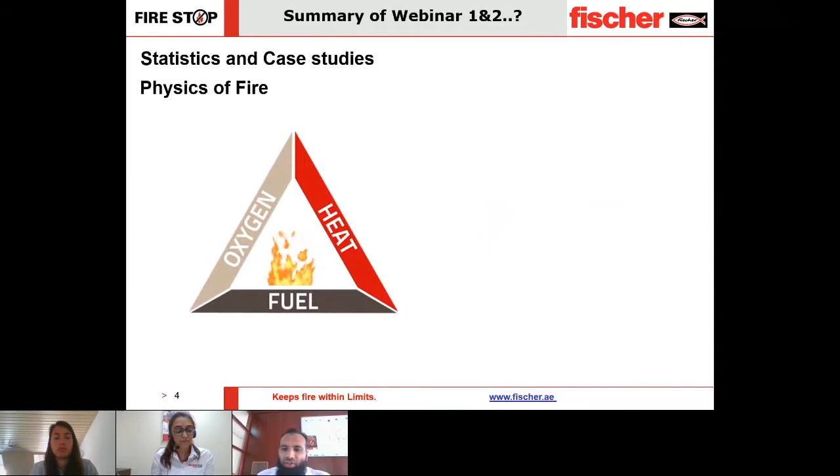Just to recap, in the first installment of this Firestop series, we had discussed some case studies concluding the importance of taking a balanced approach to fire protection, which should include the active as well as passive fire systems. We saw how fire behaves and understood the different stages of fire progression. Then we saw Firestop as part of the requirement within passive fire protection systems and the code requirements of the same.

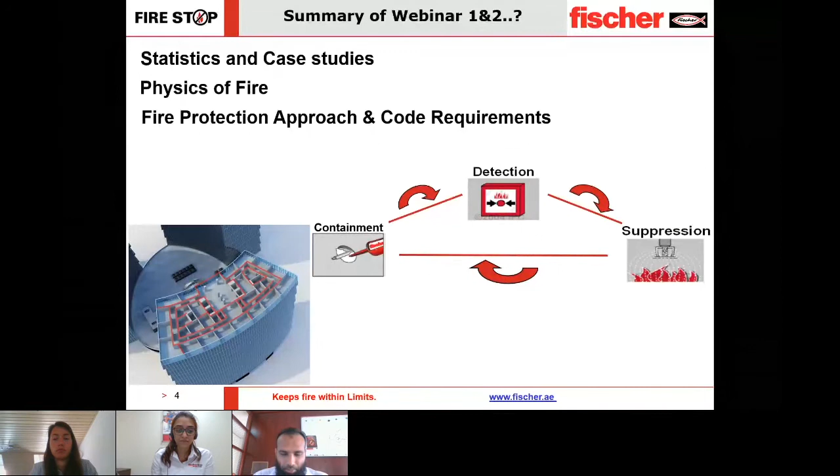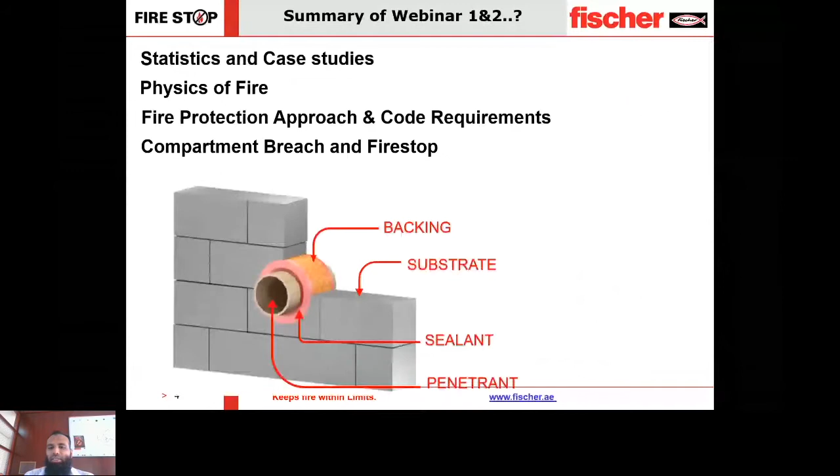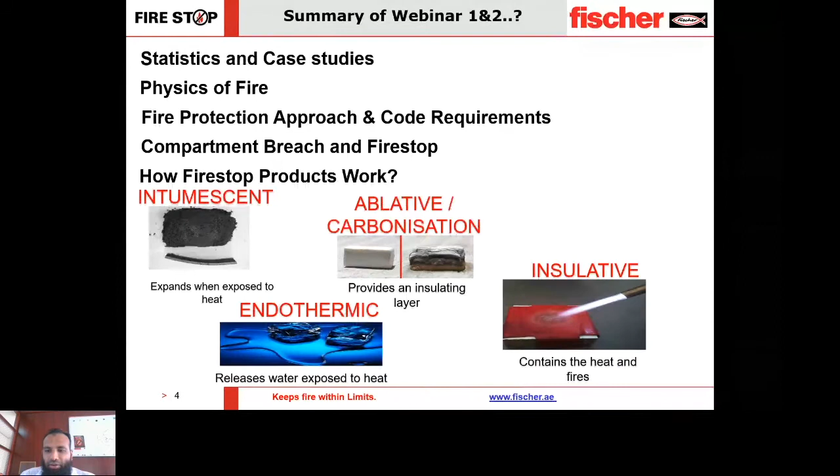In the second episode, we talked about the system approach for fire stopping, where all the elements of the system are to be considered while looking for a proper solution. We also discussed the different technologies behind the Firestop products, and finally the standards for testing and certification was discussed in detail, including the EJ or engineering judgment discussions that we had.

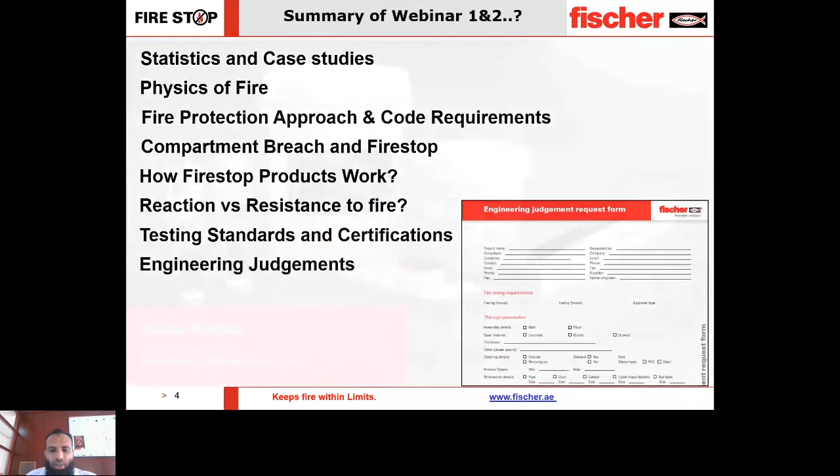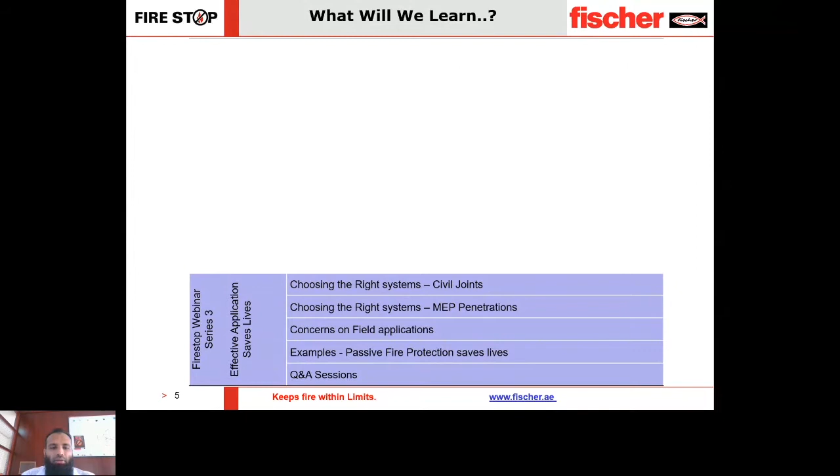Let us continue with this presentation today, which is the final in our series, and we will be looking into the right systems or solutions that we as Fischer would offer in the civil joints as well as MEP penetrations. Then we would discuss some concerns regarding applications, and finally we would wrap up the session by showing some examples of how passive fire protection worked, and a question and answer session will be at the end.

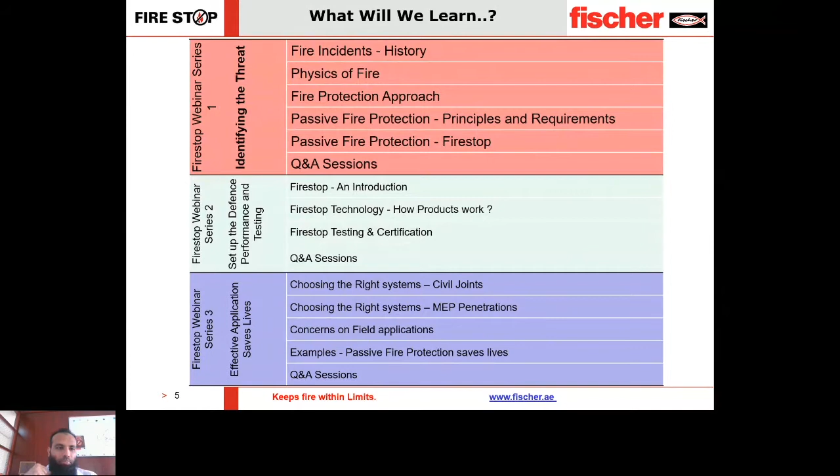So that we had covered the entire range and tried to do justice by giving as much information as possible for Firestop. In the last episode, we had shown that we have a range of products which are divided into 4 main categories: the sealants, sprays and coatings, wraps and collars, and some special products.

Now, many times people would have this question: why are there so many different products, and why can't there be one product as a solution for entire fire stopping in a project? We have seen that there are several types of breaches that are caused in a fire rated barrier. Each of these breaches has its own different set of parameters. You have different types of penetrants that are going through, and hence to address all of these solutions, all of these fire stopping requirements, we would need a range of solutions which would be addressing individual applications.

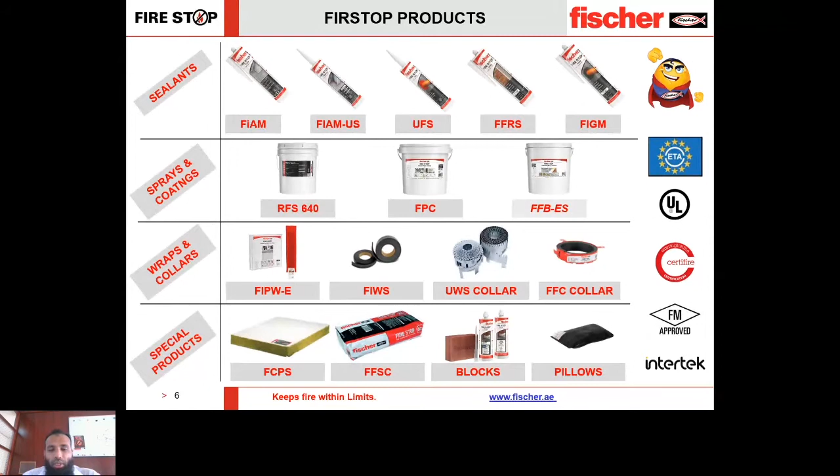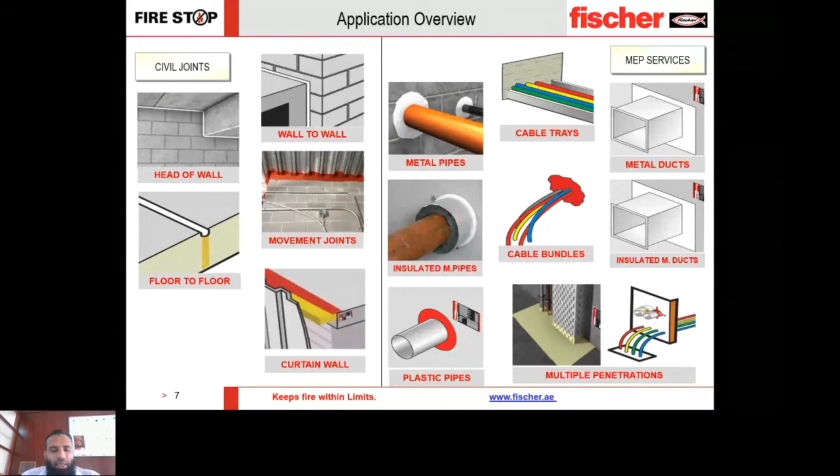We would look at the applications that we face in day-to-day fire stopping, and we have divided that for simple understanding into civil joints as well as MEP services. When we talk about civil joints, we are talking about the joints between fire-rated members, fire-rated barriers, or sometimes, as in the case of a curtain wall, a fire-rated barrier and a non-fire-rated facade system. And when we talk about MEP services, we are talking about all the different types of penetrations that would be going through.

And to discuss about the civil joints, I would like to invite Ansel. Ansel, can you take us forward in our quest for finding the right solutions for fire stopping in civil applications? Sure, thank you Muzaffar. So coming to the first application that we generally come across in the field would be the head of wall joint.

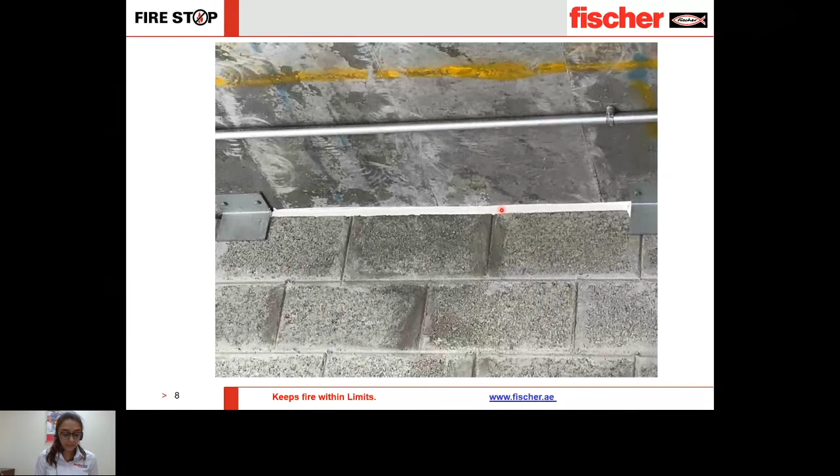This is a joint between a fire-rated wall as well as a fire-rated floor. Now we need to consider a few parameters while choosing the right system for it. The conditions would be the aesthetics, like is your joint exposed? So you will need a material that would be compliant with the painting requirements as well, and also meeting with the color requirements as per the architectural plan. Similarly, you would also need to take care that there will be some structural movement within this joint system, so the material needs to be capable to withstand the movement, and mostly you need to take care of the aesthetics or the acoustics of the joint.

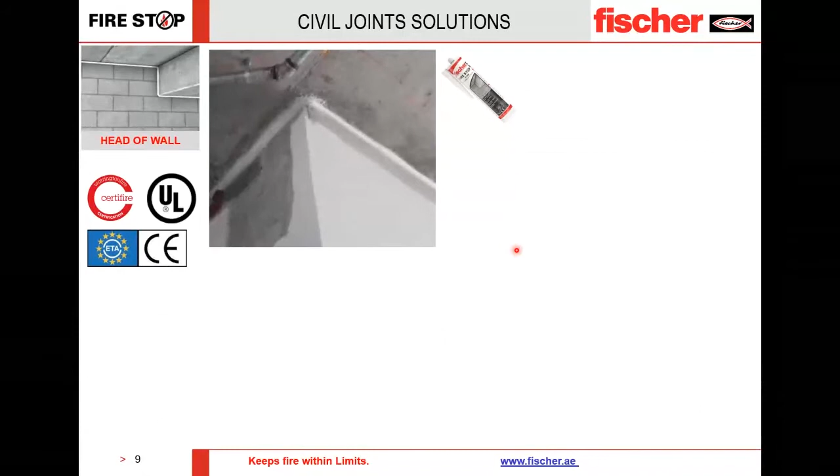So the most common solution we would propose would be our acrylic-based sealant called FIAM, Fischer Intumescent Acoustic Mastic. The name itself says that it takes care of the acoustics and it's an intumescent material. As it is an acrylic-based material, you can paint over it, and it is available in white.

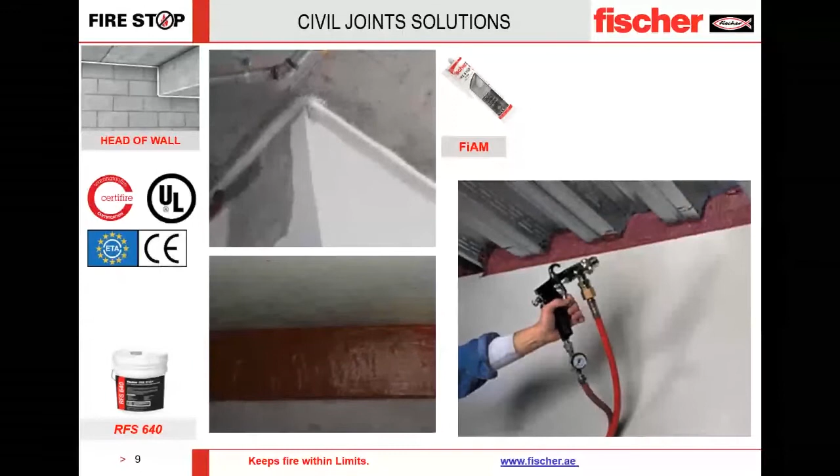You can apply the sealant with a thickness of 10 mm over a PE backing rod, or 5 mm over a stone wool backing. The movement capability is tested for up to 25%, which is enough for a normal head of wall joint. We also have another solution called the Rapid Fire Seal, or RFS 640, which is red in color, suitable for areas with a false ceiling. It has a movement capability of up to 50%, and is applied like a spray.

Moving to the next slide, the other civil joints to consider are wall-to-wall and floor-to-floor joints. The products proposed are similar to the previous application. In addition, we propose the fire-rated silicone, or FFRS, which is used for externally exposed fire barriers.

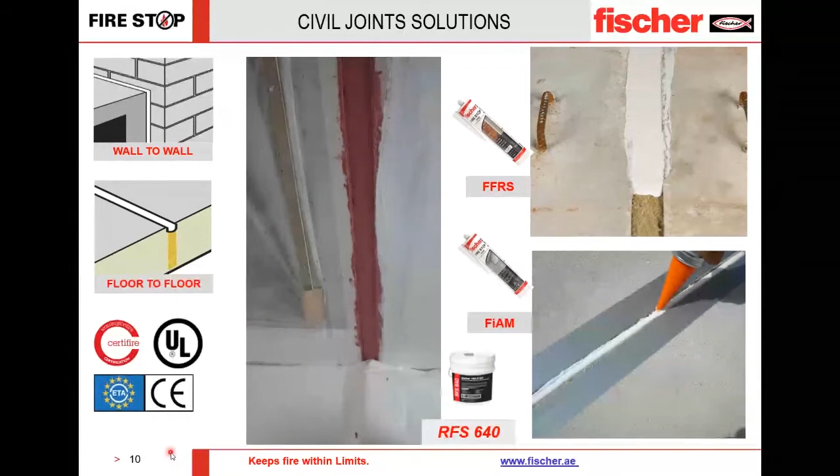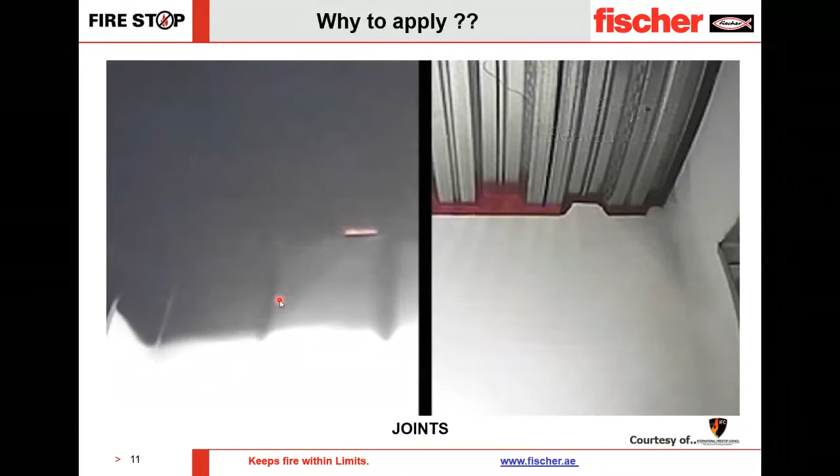Moving to the next slide, it is very important to have a properly sealed room for civil joints. In this video, you can see that an improperly sealed room fills up with a massive amount of smoke very rapidly from the joint gaps. When smoke is present, visibility is reduced, and when visibility is reduced, panic sets in, and building occupants will not be able to escape easily. It is also known that apart from flames, smoke and toxic gases are the most hazardous. So the joint must be properly sealed.

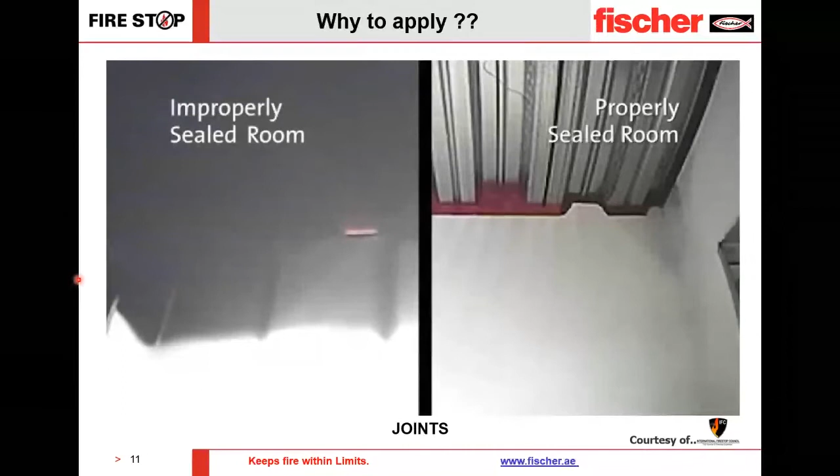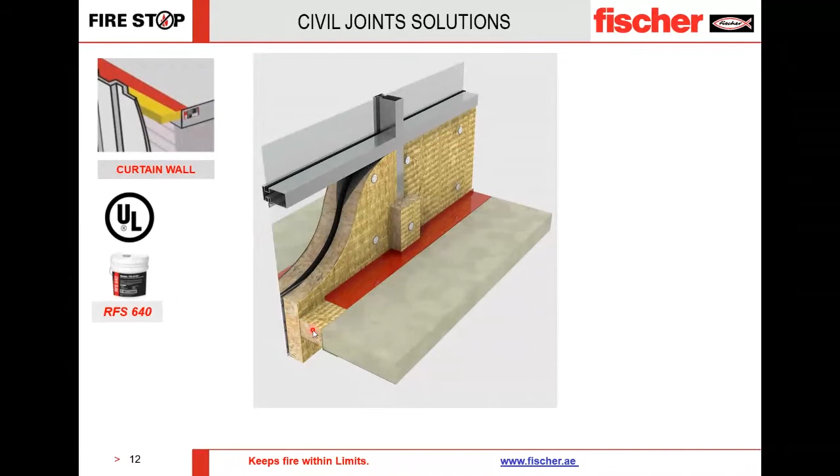Coming to curtain wall application, the main criteria here is the joint formed between a fire-rated and a non-fire-rated facade system, which would be approximately up to 200 mm. The solution for this gap should have sufficient insulation so the glass does not break in a fire incident, and then close the gap in the event of flame. The proposed product would be the RFS 640, with a mineral wool backing and a spray sealant over it.

The thickness of sealing required to reach a fire rating of 2 hours is 1.6 mm thick. When it dries, it reduces to 0.6 mm thickness, and this is capable of taking a movement of 5%.

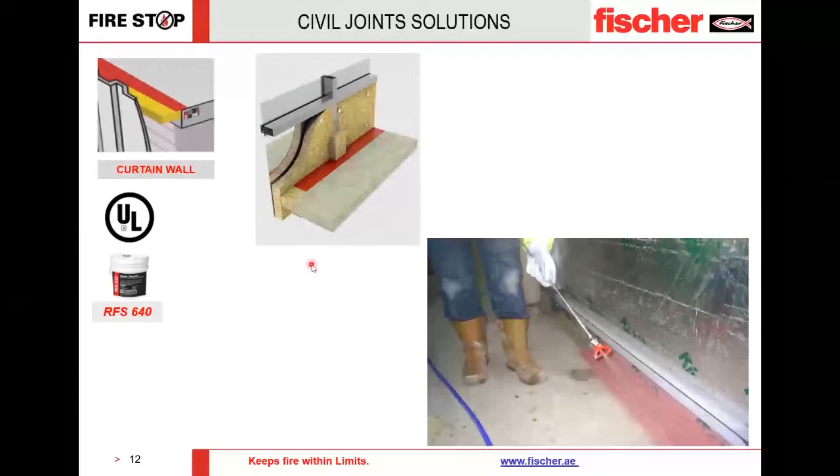You can also use another product, the FFB-ES, but the thickness is slightly more, over 2 mm. We also have a dry type of system where you compress the material and fix it using brackets, that's all. This material would be predominantly used even for glass facades as well as ventilated facades.

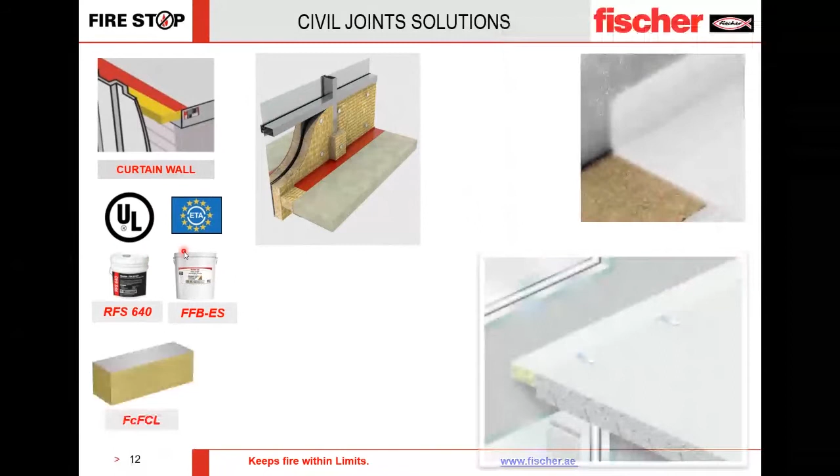This brings us to our second category, the rain screen facades, or cavity/ventilated facades. Rain screen systems are constructed with either stone material or an aluminium composite panel sheet. Quite often we see ACP sheets used, and these sheets provide an easy path for flames to pass and spread across the external facade.

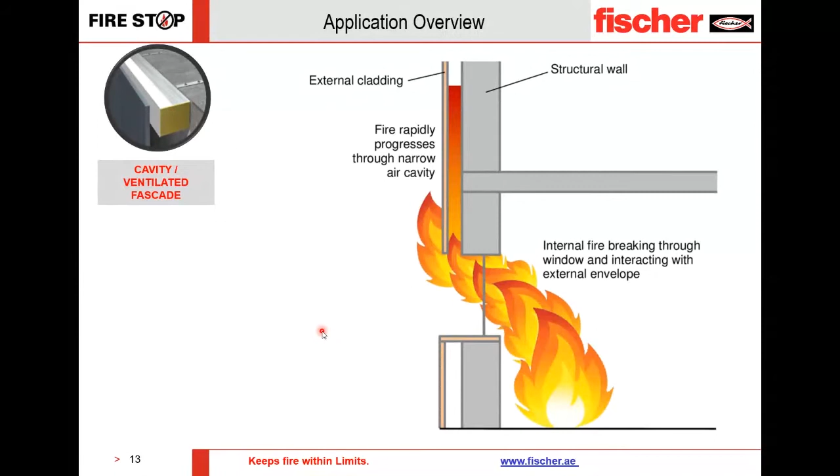Now, these ventilated gaps are a requirement for functional purposes. However, during a fire, this does not behave in a positive manner. So we need a product that provides ventilation during the lifespan of the building, but when exposed to fire, closes the gap. We have a product called the Ventistop, which has an intumescent strip that allows a ventilated gap of 25 mm, and when exposed to fire, it expands and closes the gap behind the facade itself.

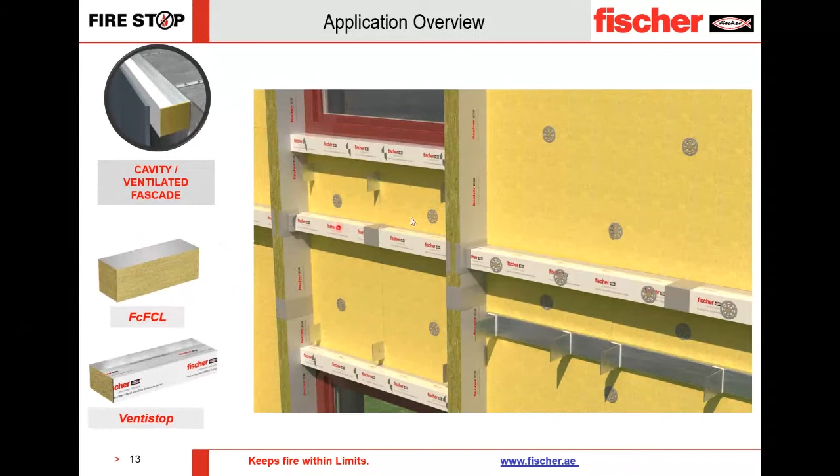We have an additional product, the FCFCL, which is placed vertically. In the next slide, we see an example of a facade fire, which is very common these days. The recent one being the Abbco Tower in Sharjah, UAE, where the facade played an important role in the spread of fire. So providing a proper solution is paramount to ensuring the safety of occupants.

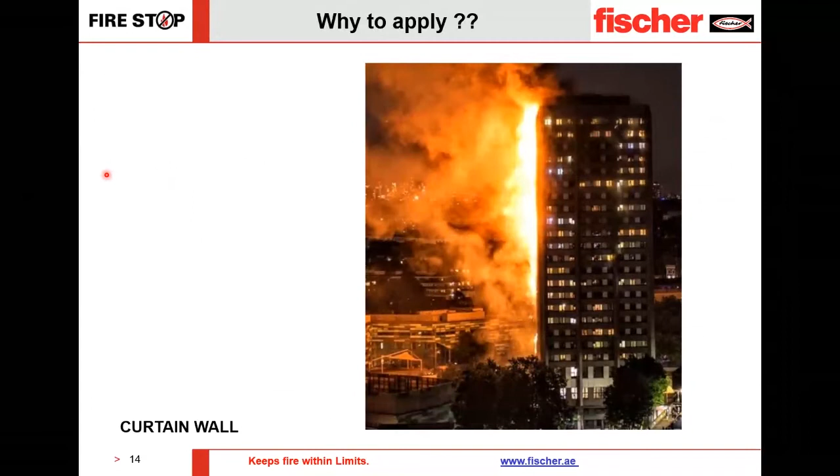Thank you, Ansel. Thank you very much for giving us a brief, Zafar, on the civil joints. Civil joints applications are really, really important. It is very important to note that civil joints are continuous joints, and a proper solution there would ensure safety of the building occupants. Now, moving on from civil joints, we come to MEP services.

In MEP services, we have several penetrations, and the first common penetration we look at are the pipes. Within the pipes class, we have the metallic pipes. So, Marion, can you take us forward in the metallic pipe solutions? What kind of metal pipes do we see on usual projects? Sure, Mustafa. Thank you very much for the introduction.

So first of all, for fire stopping MEP services, we always need to take a close look at what exact type of penetrations are going through an opening in a floor or wall. For metallic pipes on the construction site, you will find a huge variety, but metallic pipes are mainly made out of steel or copper.

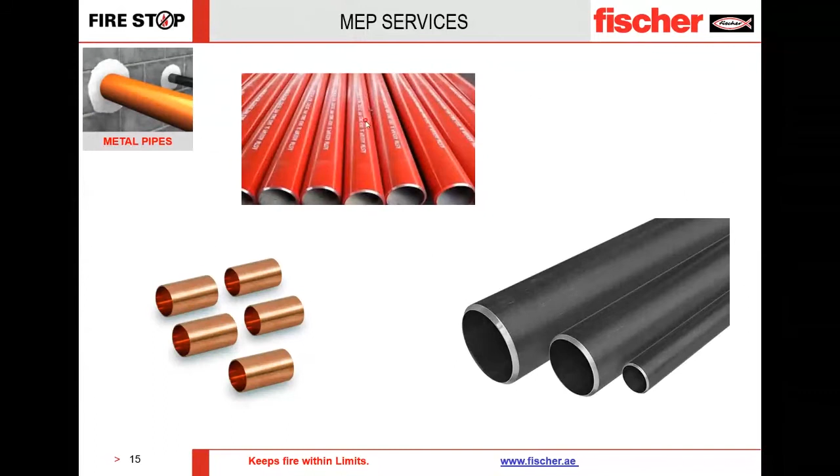For metallic pipes, Fischer can offer a variety of sealants with different approvals. The two most popular ones we offer are the Fischer EMUS and the Fischer RFS Rapid Fire Seal. Both are tested to the UL testing standards and have multiple UL listed systems.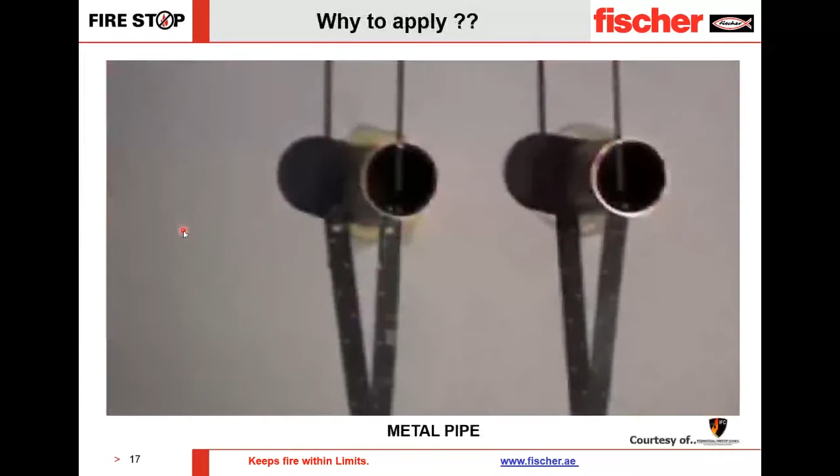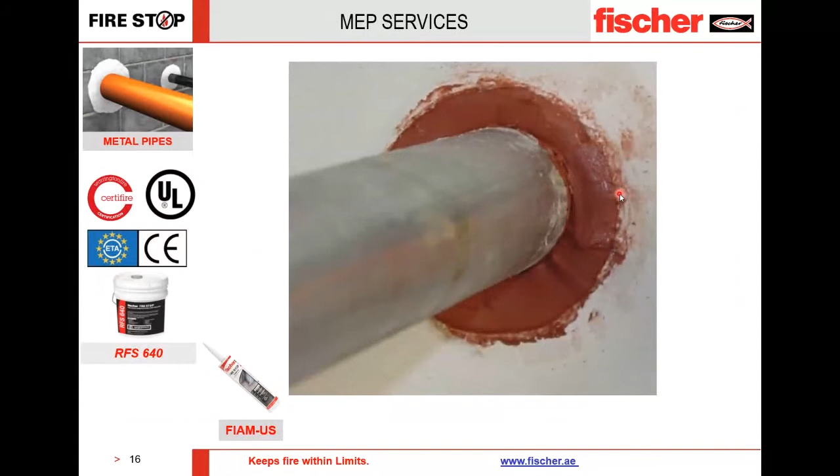The application for metallic pipes is usually very simple, as the advantage of a metallic pipe is that in a fire it stays integral and will not decompose. Because of that, we only need to close down the gap between the pipe and the opening, and the application is finished. We prepared also a short video which shows the impact a proper Firestop sealant has around a metallic pipe, compared to just using the standard foam which you often find on construction sites.

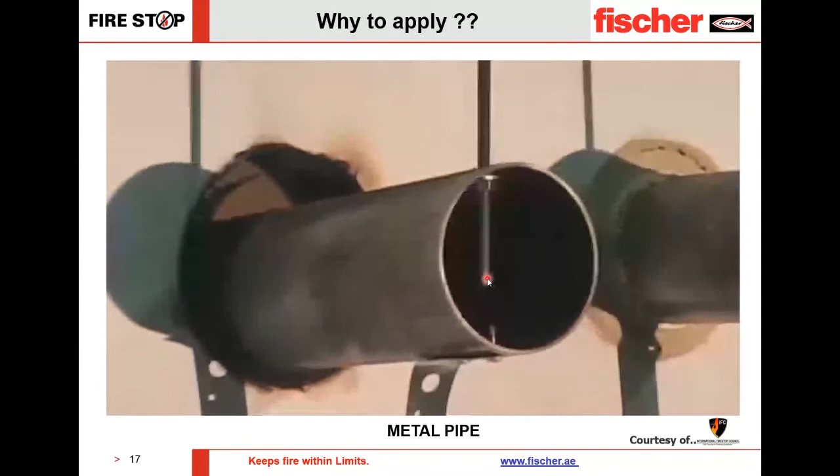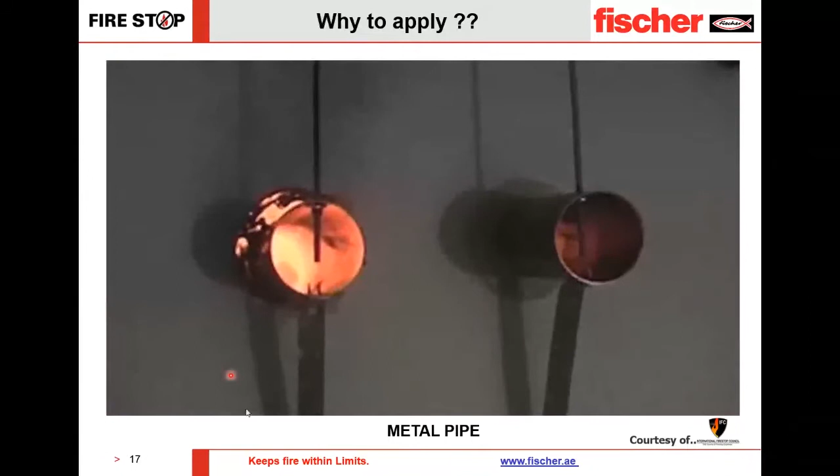From the video, you can imagine on the left pipe, which is not sealed properly, how quickly the heat, flames, and the fire itself will spread from one part of the building to another, especially in comparison to the proper fire protection done on the right pipe.

Now let's move on to another type of pipe we often find on construction sites, which are the insulated pipes. The choice of the right product strongly depends on the insulation material used. Mainly, we can differentiate between three types of insulation: stone wool, glass wool, or a rubber type insulation, as seen on the right bottom, just for example like the Armaflex insulation.

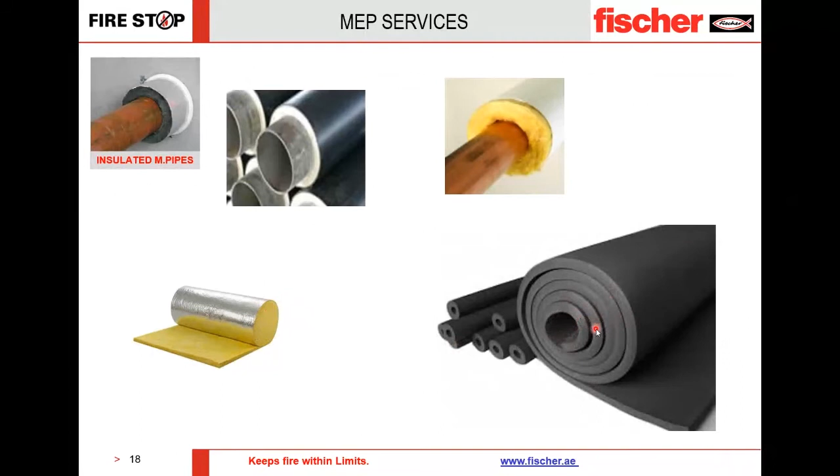So as an example, if a pipe is insulated with stone wool, this actually helps us under fire conditions, as stone wool insulates the pipe and stays integral throughout the fire, making it way more difficult for the heat to transfer through a wall or floor. On the other hand, if you have a rubber insulation, it will melt very quickly in a fire, leaving a bigger opening for the fire and flames to pass through. In this case, we need to use a different type of sealant.

So the Fischer solutions for insulated pipes are, for example, the FIAM-US, which can be used perfectly around stone wool insulation, or the UFS, the Universal Fire-Stopping Sealant. For the rubber insulation, we can offer a very good special sealant, the FIGM, the Fischer Intumescent Graphite Mastic. It has a ULEU approval, and the graphite contained in the sealant makes it expand very big when exposed to heat.

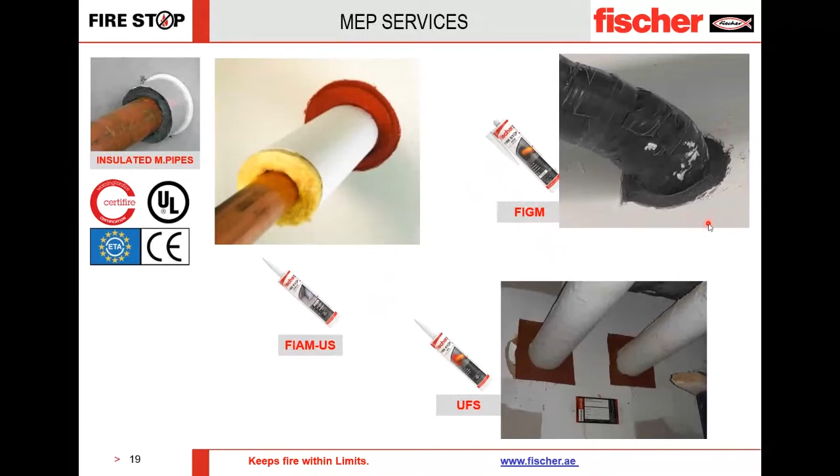On the next slide, there is again a video which shows on the left pipe the use of a B1 foam, which you usually find on construction sites, and on the right side a proper fire stopping, which could be, for example, the FIGM solution.

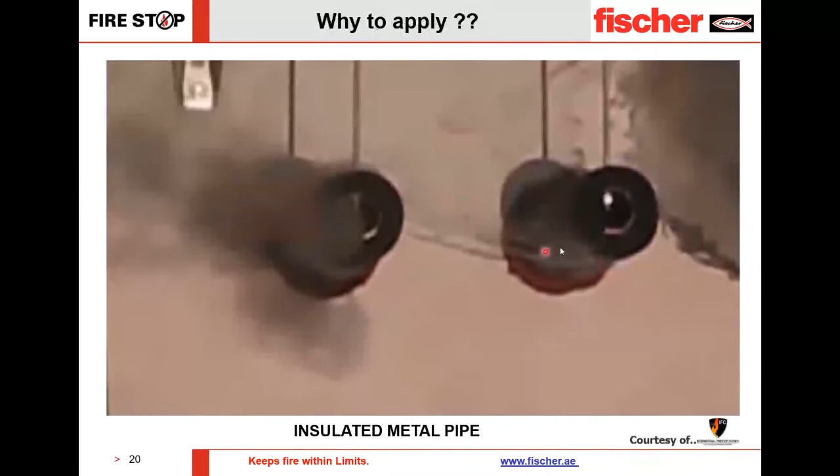What is important to mention here is that the insulation is completely the same, and you can see that on the left pipe the insulation is completely melted away. There's a huge gap where fire can pass through, and the sealant used on the left pipe is not doing any good to keep the fire away.

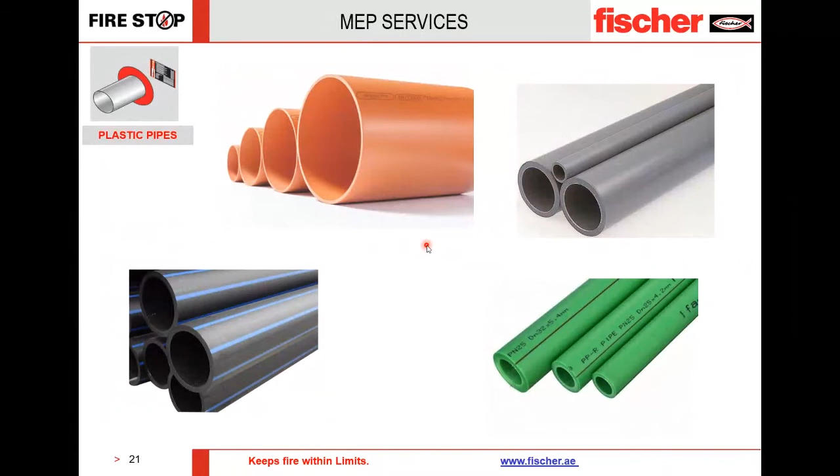The last type of pipe I want to present are the plastic pipes, which we also very often find in buildings, and they can be made out of, for example, PVC, PP, or PE. So what is the difficulty with the plastic pipes? In the event of a fire, the pipes will burn or melt away, so we need to use a product which is able to fill and close this resulting opening.

For plastic pipes, Fischer can offer 3 different types of products, first of all a variety of sealants. So for example, if the pipe diameter is not that big, we could use the UFS and the FIAM-US, just in comparison to the insulated pipes. If the pipe diameter is a little bigger, or we have a different type of pipe, we can also use the FiGM with the UL/EU approval.

On the other hand, we also can offer wrap strips or fire collars, which in the end all basically do the same. It just depends on the customer's needs if they want to have a visible or an invisible fire stop solution.

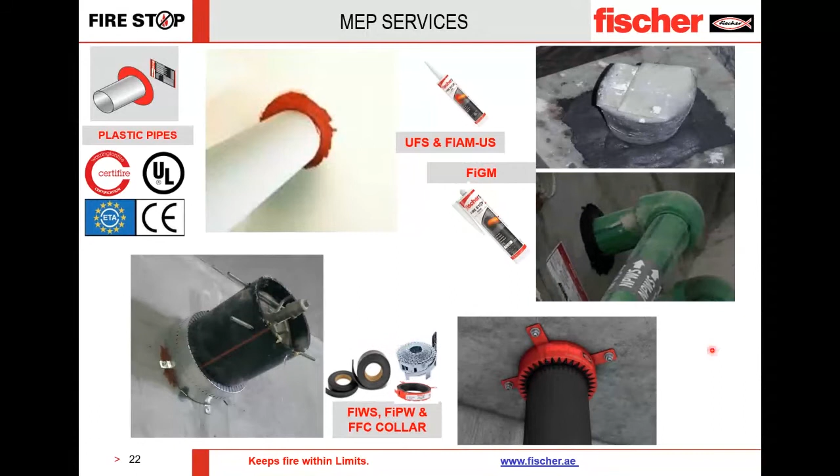So the next video shows the significant difference between a proper and an improper fire stop solution. The pipe on the right has been fire stopped correctly using a fire collar, as you can see in the video. The other pipe was just sealed using a standard sealant.

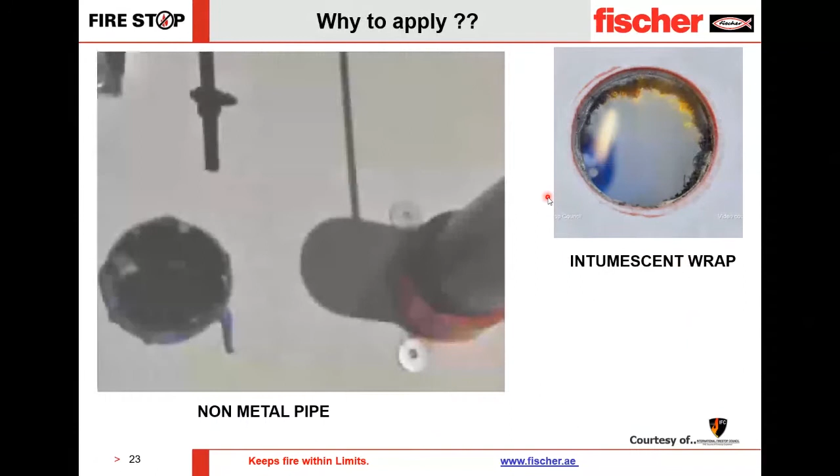And yeah, you can see it pretty easily. There's fire and smoke coming through. The opening is completely open. The pipe is completely melted away. There's nothing left of it.

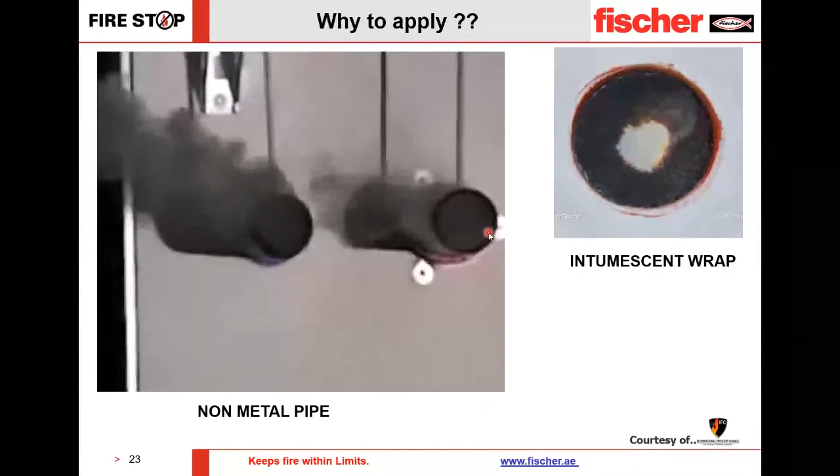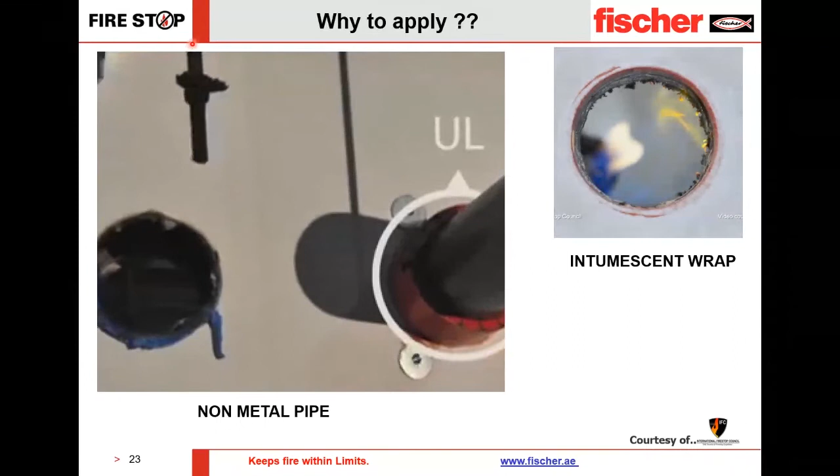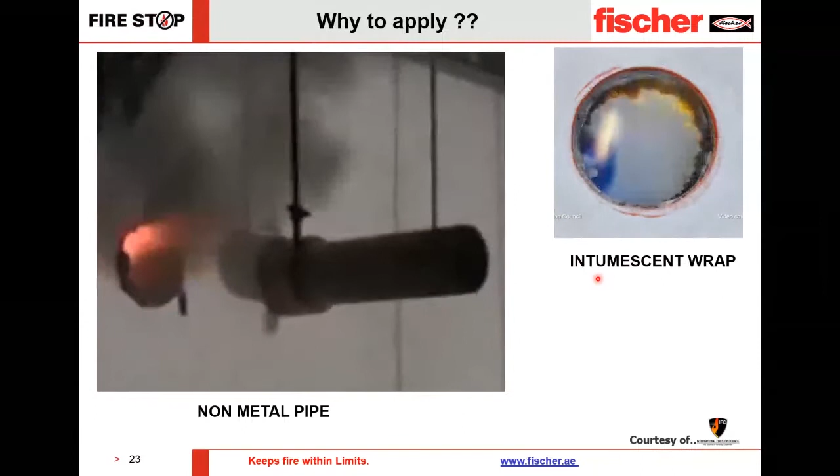On the other hand, when we use the fire collar, there's just a little bit of smoke coming out of the opening, but the pipe still stays the way it is. The video on the right shows how a wrap strip works. The strip contains a graphite material which expands a lot when exposed to heat.

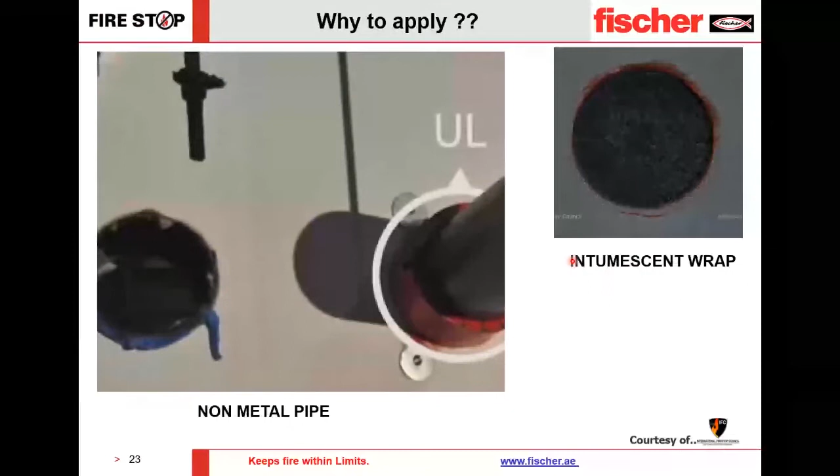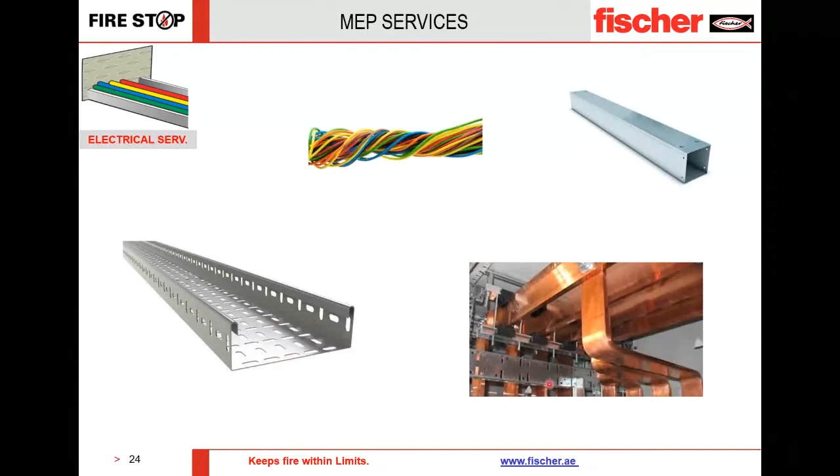All right, so far for the pipes. But in a building, we not only need pipes for the water supply, we of course also want electricity. So now let's take a look at the electrical applications. In a building, we find a lot of single or bunched cables, cable trays or trunkings, or even busways. I quickly would like to show you how we can cope with these different electrical applications, starting with the cable bundles.

Cables are mostly structured of metallic lines on the inside and a plastic jacketing on the outside. So the product we use for fire stopping these cables needs to be able to cope with both types of materials. Perfect for these situations, again, are our two sealants, FIAM-US and UFS.

For cable applications, we can also offer a special kind of product, the Fischer FBS foam barrier system, which has a UL/US and a UL/EU approval. This system comes in Firestop blocks and a Firestop foam, and it is perfectly used if it is necessary during the lifetime of a building to add additional cables, as these can just be pushed through the application, and it's still an approved solution.

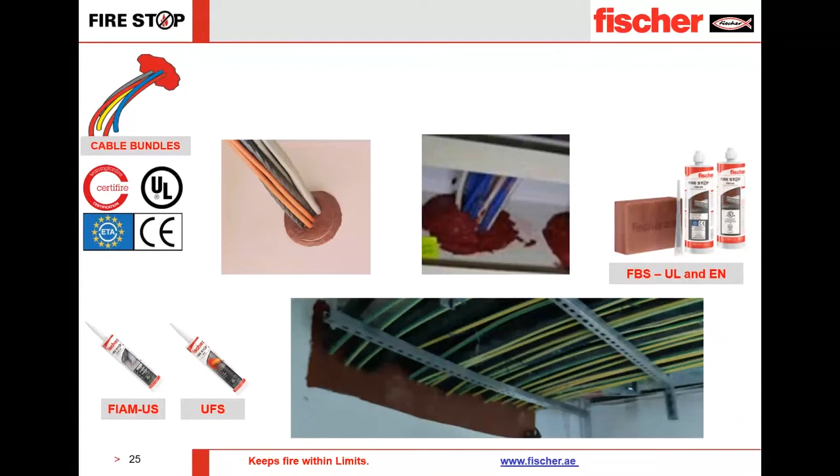For cable trays, on the next slide, we have a little bit of different products, as mostly the openings for cable trays are a little bit bigger, as the cable trays are bigger, and there's also more cables running through the opening.

In this case, products may be, for example, the UFS sealant, which you maybe will remember from the construction joints, especially for head of wall applications. The UFS sealant is then installed on top of a stone wool backing material.

If we have a floor application, like on the right picture in the top, it is easier to use the Fischer FFSC, the Firestop compound or mortar, because it is an easier solution. You can just pour it in the opening and it's finished.

On the other hand, for wall applications, we mainly use the Fischer FCPS board, the Fischer coated panel system, in conjunction with a little bit of sealant around the cables.

If you know that during the lifetime of the building a lot of cables are going to be added or removed from the opening regularly, then Fischer can offer Firestop pillows, which can easily be installed and removed from the opening.

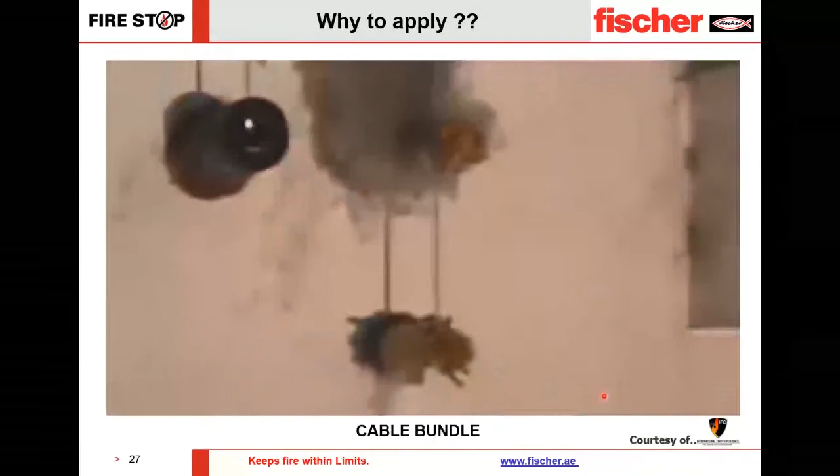Again, we have prepared a video which shows on top cables which have not been Firestopped correctly. You can see the cables, the jacketing of the cable melts away, and there's a lot of smoke coming out of the opening. On the bottom, Firestopping has been done correctly using a sealant which has been tested to the according standard, and there's almost no smoke coming through, so the passage of fire, smoke, flames, heat is prevented very well.

Another type of penetrant we regularly find in buildings are metallic ducts for air conditioning or heating purposes. They sometimes have an insulation, or are just only metallic.

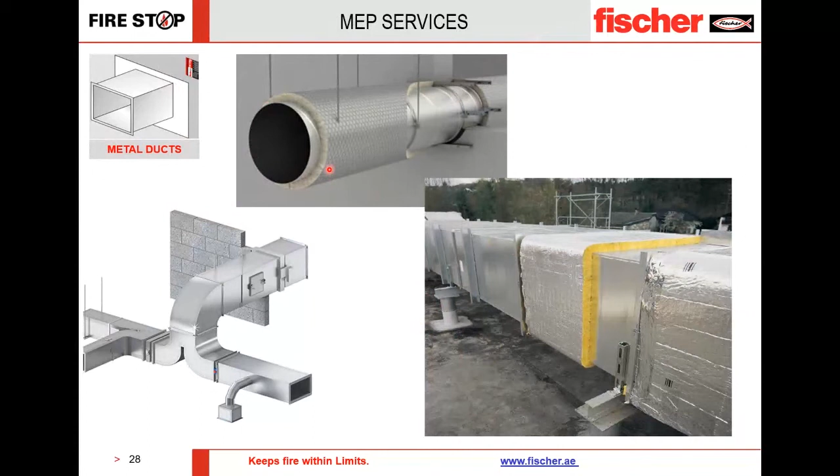Depending on the type of duct and the size of the opening, we can use the sealants UFS or FIAM-US to close down the gap between the duct and the wall or floor.

In some cases, if, for example, the duct is insulated with a rubber type insulation, we need a solution which is able to close down the gap of the melting insulation. In this case, again, we can use the Fischer FIGM, the graphite mastic, which expands a little bit more.

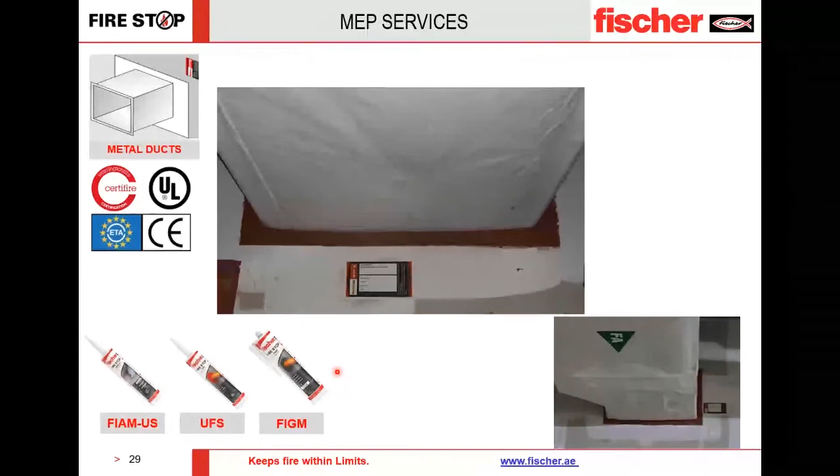On the next slide, you will find pictures of what we also sometimes find in buildings, which are fire dampers, installed in the floor or wall. Fire dampers allow the air to pass through under normal conditions, but will close down in a fire to prevent the passage of smoke.

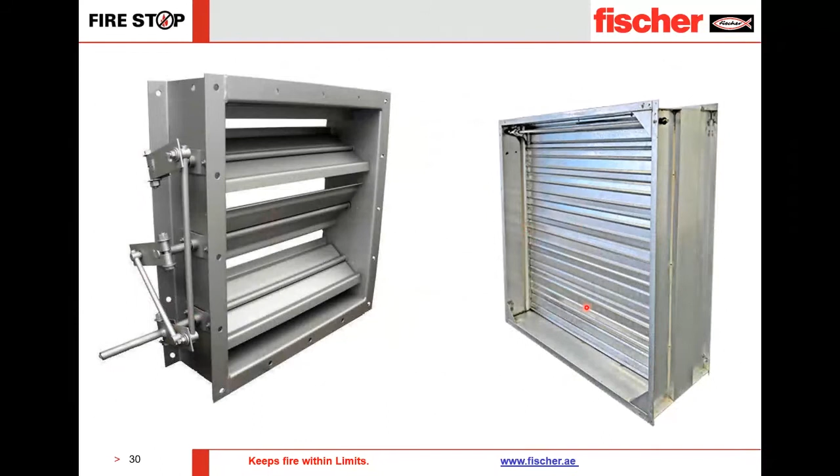Here we usually only have a small gap in the wall or the floor between the duct and the substrate, and we can use, for example, a sealant like our FiAM, the intumescent acoustic mastic, as a smoke seal.

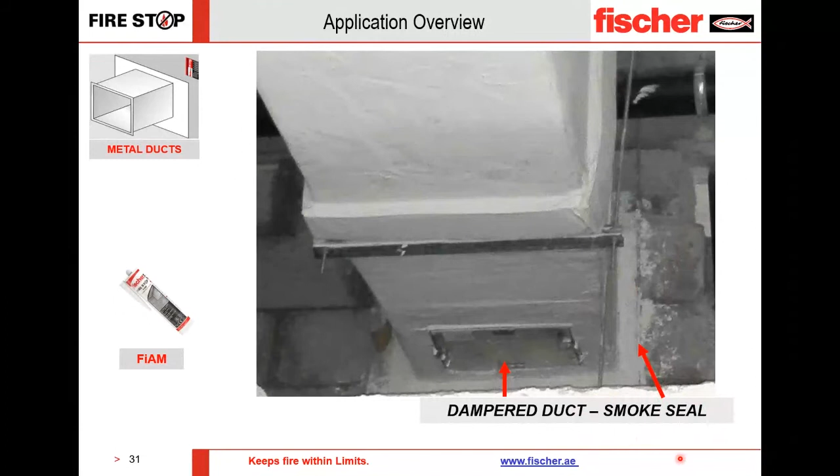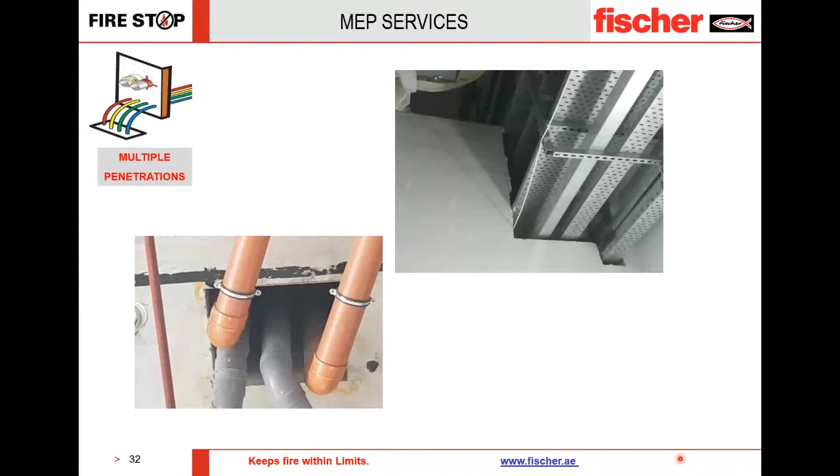For the last type of applications, we have multiple penetrations. In a construction site, in most cases, we don't have only one type of penetrant going through an opening. Instead, we have one huge opening where a lot of different types of pipes, cables, cable trays, and other penetrants are going through a wall or a floor.

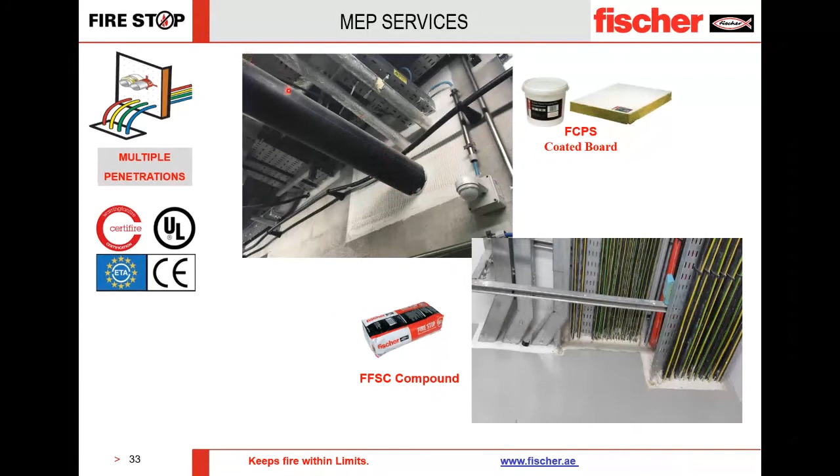For this, Fischer can offer mainly two solutions: first, the FCPS coated panel system, or the FFSC compound solution, which can also be used around different penetrants. We use the FCPS or FFSC system to close down the opening, and then we fire stop each penetrant individually depending on what type of penetrant is going through the floor or wall.

So that was it for the MEP services and all the Fischer solutions that we can offer for that. Mustafa, I'm handing back to you.

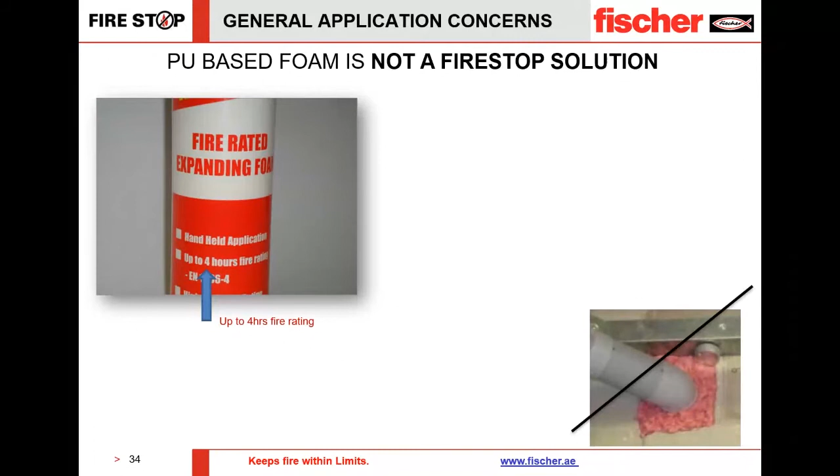We talk about Firestop foam. Basically, it is a product which is approved for certain applications, specifically for joints, and it does not have any application for head of wall, for MEP services, I'm sorry.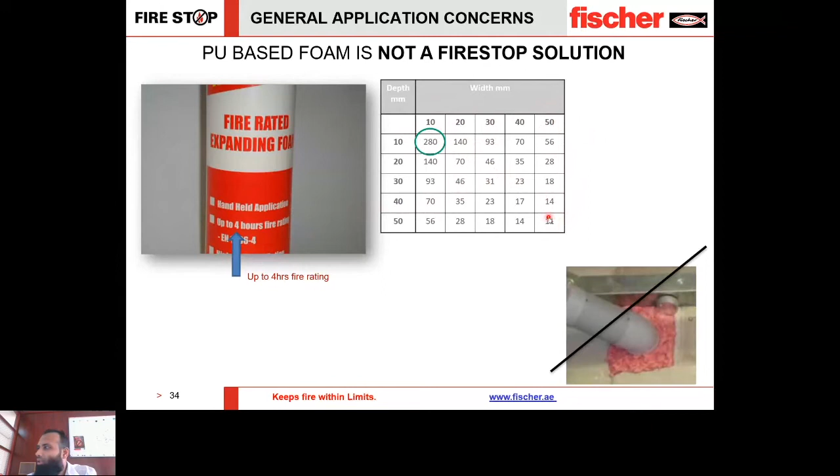Even when we talk about civil joints, if your joint width is up to 10 mm, then you can use the Firestop foam up to the complete rating that is required. But the moment the joint width increases, the rating falls drastically, where at a 50 mm joint width the rating falls down to just 11 minutes. So we have to be careful on what product we propose and where we use it.

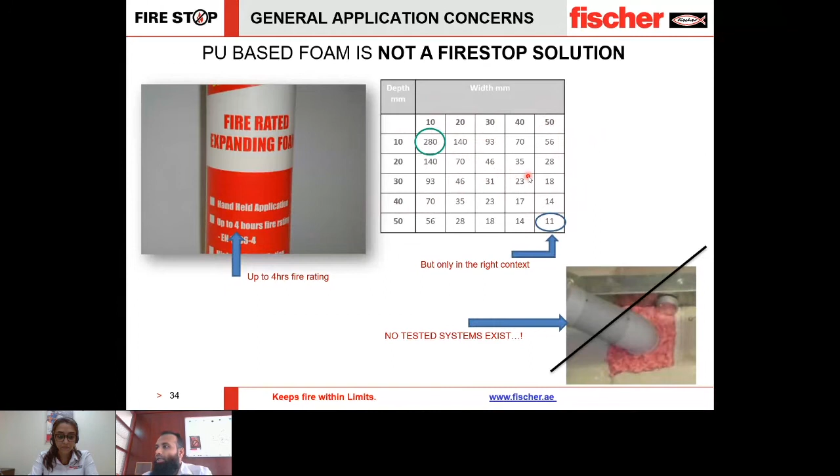The second thing we commonly see on project sites is where people have made an opening bigger than required, and then they try to close it down by using just cement mortar. Now, cement mortar, as you know, is a very bad product.

When it tries to cure, it reduces in overall size, and by doing that, it generates a lot of cracks within itself. And when there are cracks, they are not good for fire, and spread of smoke happens very easily. Especially during a fire incident, the cracks develop further, and this results in a huge propagation of smoke.

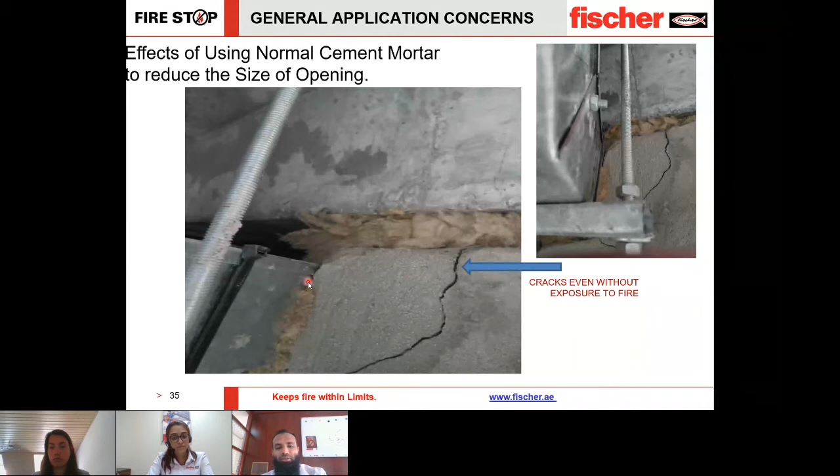So the right solution here, as was discussed by Marion, was the Firestop compound to be used correctly to reduce the opening size, and then using individual firestopping, as we discussed, in the shape of an engineering judgment that we provide.

Also, when we come across the project site, we come across cracks which we see in sealants. Now, these cracks are generally developed due to using incorrect thickness of the sealant. So many people might have this feeling that if I increase the sealant thickness, I would get a higher rating and be more safe.

This is also an incorrect understanding, because the more thickness you have, the more non-uniform curing the sealant will undergo, and because of that you would have these surface cracks.

Let me clarify one more point here. These sealants, being intumescent, are absolutely fine if they have some surface cracks on their body. However, because of the aesthetic and the appearance, it would not be a good idea to increase the thickness beyond the recommended thickness.

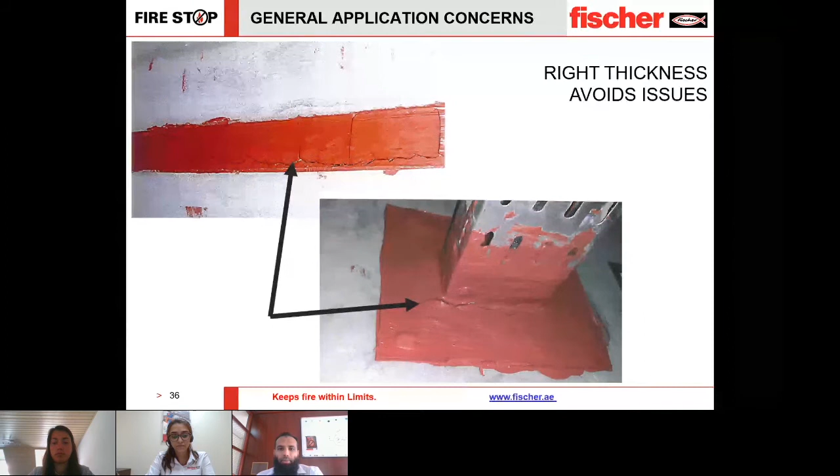Finally, it is very important to do proper tooling and proper finishing of the sealant. When you apply the sealant, you have to clean the substrate, then do proper finishing and tooling to ensure there are no air bubbles within the sealant.

The air bubble, when it tries to escape, generates this kind of air bubble appearance on the sealant body itself. The problem is the sealant thickness at these locations will be lesser than required, and because of that it might end up having a weak point where fire can break through this barrier.

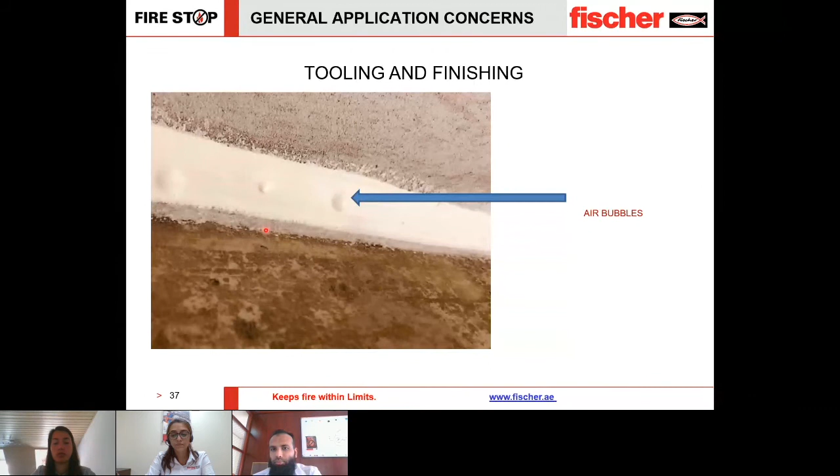Moving ahead, when we talk about ducts as a solution, we always need to remember that there has to be a retaining angle. If there is no retaining angle, then it is not completely complying with the tested system, and we need to see if the duct size is within a small size, or there are certain tested systems without a retaining angle, then of course we can provide a solution.

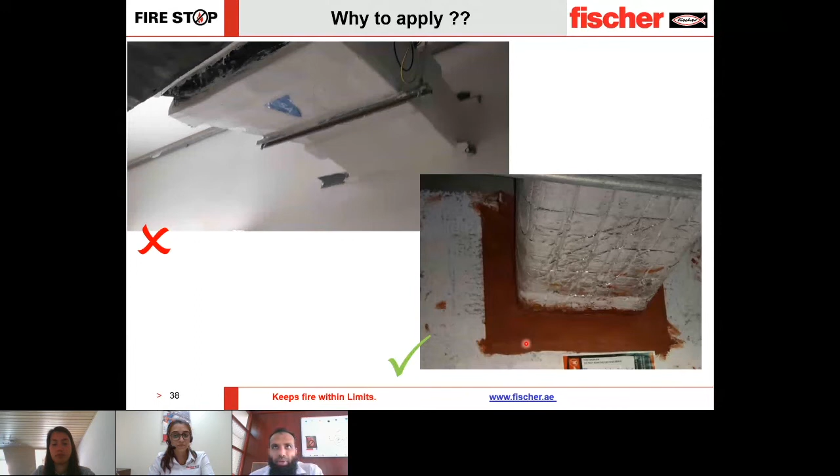But the basic thumb rule is, the bigger the duct size, the more you need a kind of restraining element or retaining angle to ensure the duct stays in place in case of a fire, and the sealant and backing material can behave and prevent the passage of smoke and flame that we want to prevent.

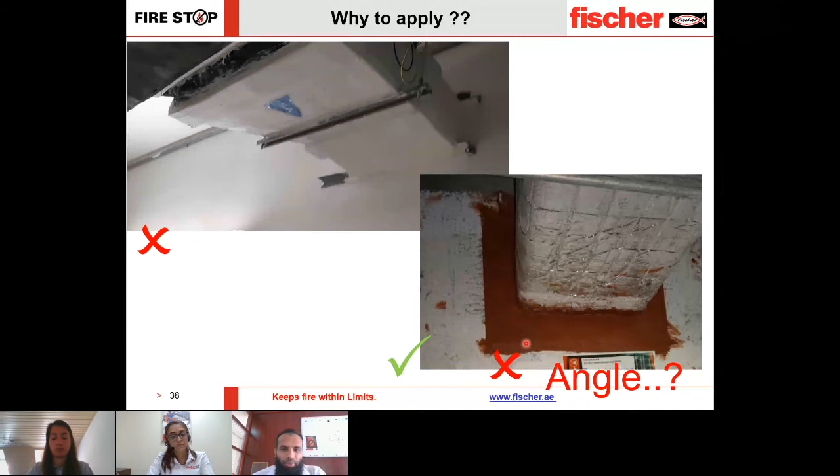Finally, we would like to show you some examples before we move on to the question and answers, where we could see how passive fire protection as a system prevents the spread of fire within the property.

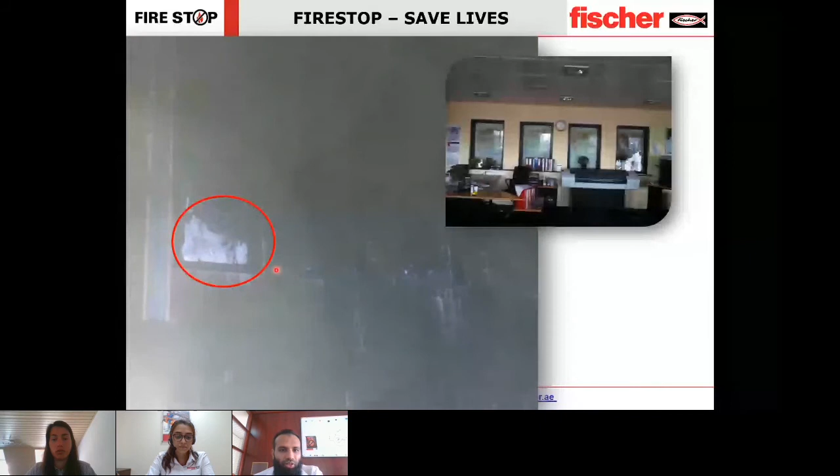So you could see that the fire which happened in the warehouse didn't affect the office space because proper fire stopping was done in the fire rated barrier itself, preventing the passage of flame and smoke through that fire resistant barrier.

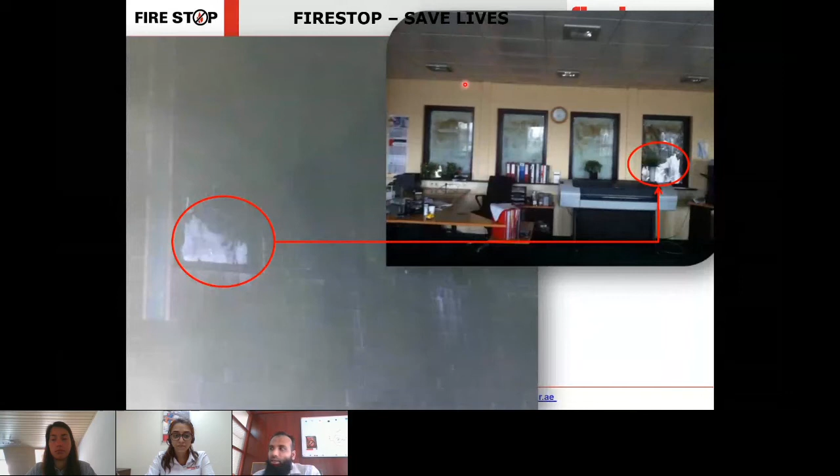But let us open the forum for question answers, and let me go through the questions tab to have a look at the questions that have been posted today. So we have some questions that have come in, and let us start answering some of them within the time remaining.

Is bubble generation in the sealant negligible compared to intumescent property of fire stopping? Mr. Mohammed had asked this question, and the answer is simple: if you have a bubble which is a big size, then the amount of sealant that was required in that particular location has reduced, so the expected intumescence would not really function over there. So it should be on a case-to-case basis - if there is a large bubble, we redo the work there, or if there is a small bubble, maybe we can just update or fill up the sealant and finish. That would be fine.